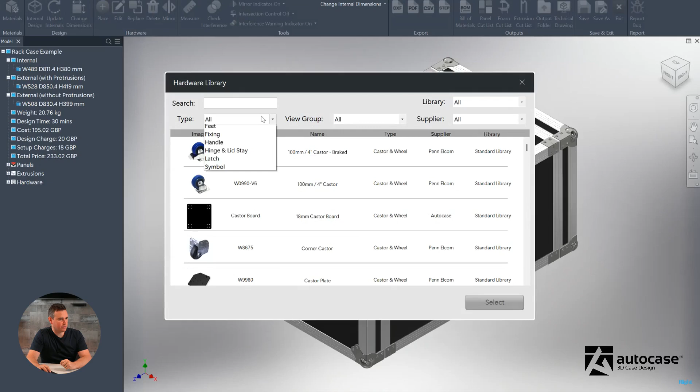So we'll choose a latch from the library. We'll find a medium latch, something like this one here. The program will automatically offer us all the options of where it could go.

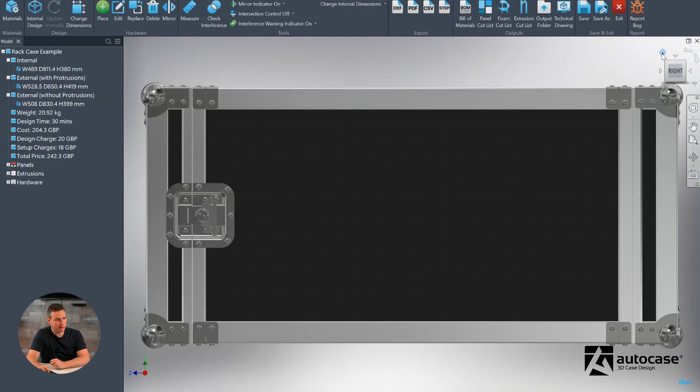We'll choose the center anchor point and leave the latch central, place that on the case, and then mirror that around. You can either select the hardware or the work planes first, it doesn't make much odds. So we've selected our 2 work planes and now I'm going to select the hardware.

So now we have 4 latches mirrored around the case. And then if we come around to this right hand side and find a handle that we want to use. So I've chosen this handle.

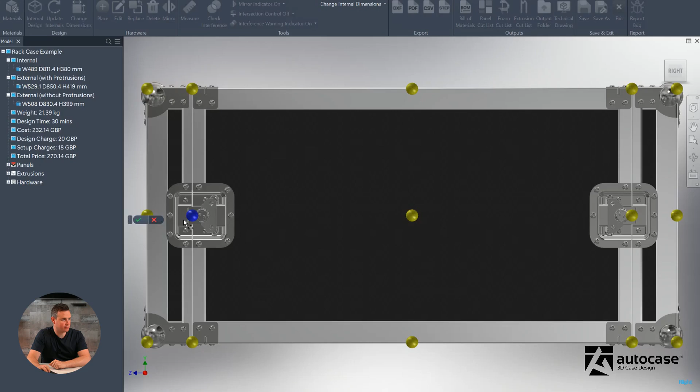From an anchor point of view, probably if we want to keep these handles central on the height but keep them close to one side, I'd use this anchor point and then move the handle over, central on the height, a little bit of space. And then once that's on the case, we can mirror that around as well.

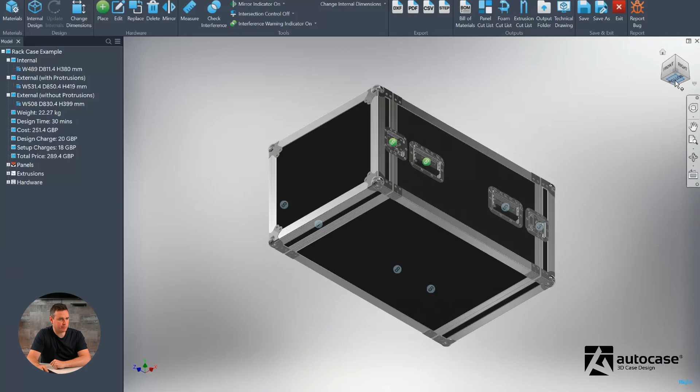So now we've got 4 handles, 4 latches, and we could also put some feet on the bottom as well. This one here would work, 16mm foot.

Just like any other piece of hardware, we can decide where that's going to anchor from. Choose this top corner and I'm going to tuck it in. You could use a measurement, but I'm just going to tuck it in visually up here. And then again, we can mirror that.

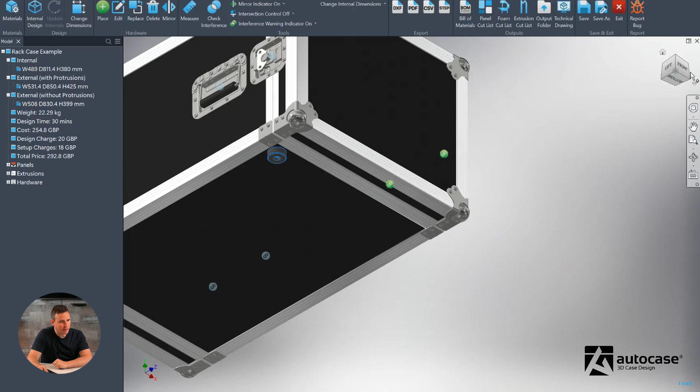Just something to note, if you've clicked on a piece of hardware and then you use the view cube, it will rotate and view around that piece of hardware that you've selected. So I'm going to mirror, use this piece of hardware, and then that's going to go across this work plane and this work plane. Check on the underside, there they are.

So now we're going to go into the internal view and add the rack strip in. Currently you need to manually calculate the height that you need for the size of rack strip. So once you've done your calculation, in this example I've already allowed 380mm, which will give me plenty of space for an 8U rack strip.

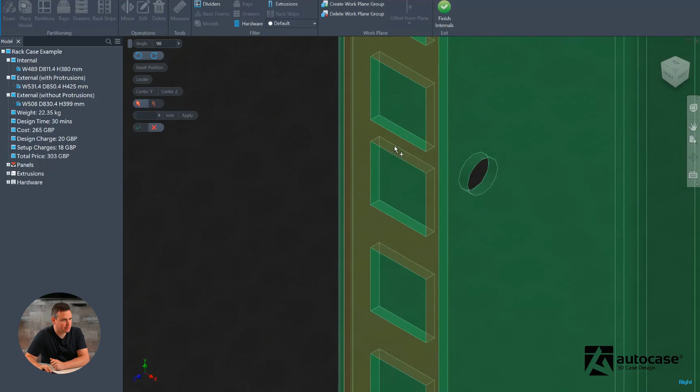Let's get into the internal design and then we can choose rack strips from the top and find an 8U. What we do is we click on the face that we want to place that on, essentially selecting a face and then selecting a second face or work plane.

And then we have a measurement here. So currently we have 287mm from the face to the work plane, and I want that to be 0, then hit apply. That's important, that's done the front referencing.

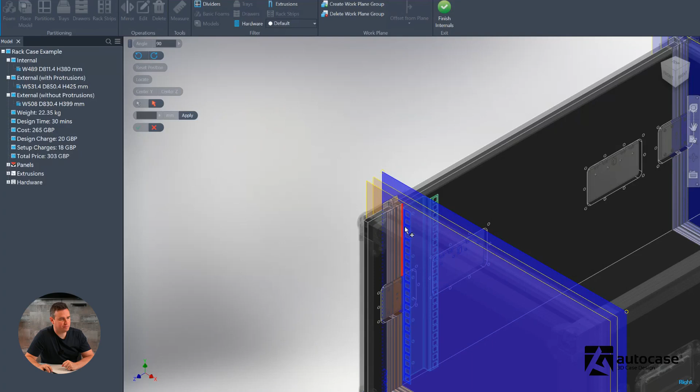We now need to reference the height. So go in and very carefully get a top flat edge, and then we'll use an inner case top face as well. So now we can see we have 10mm between those 2 faces.

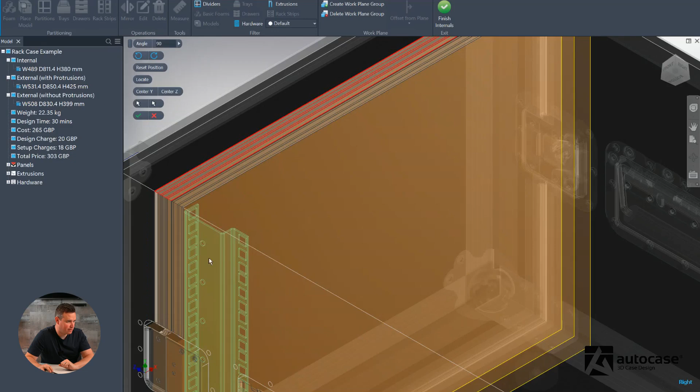I can do less and hit apply, and that moves it up, and then I can hit my green tick. But what you will notice is we are now not central, we are higher than we are at the bottom. So we want to get that in the middle again.

It was already in the middle before I changed it. So edit the rack strip, and we have this easy center Y. You can see we've got a Y down here and we've got center Y. That automatically centers that for us, and then we hit the green tick.

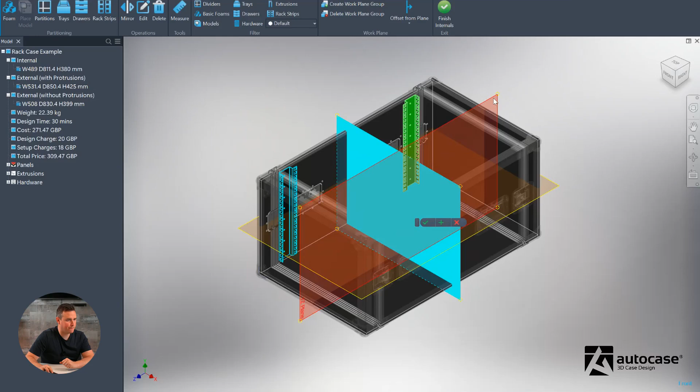And then just like the external case, we can mirror. So click on the rack strip, click around on the work planes, and then the green tick. And they are now all placed, as you can see.

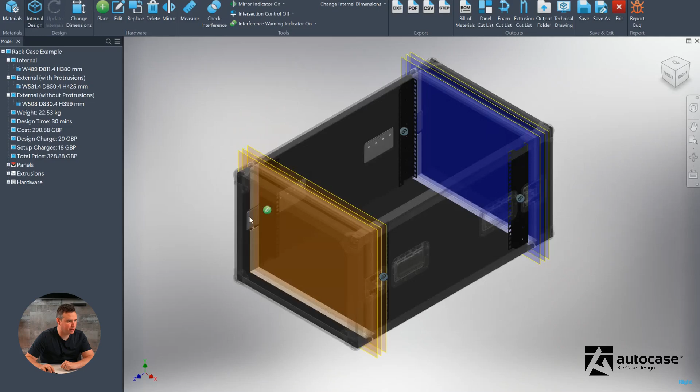Central. And then if we come out of the internal design, you'll be able to see the holes that are programmed here are drilled on the panel and will appear on the DXF for the fixing holes. From an internal point of view, this is just a very basic example of the rack strip.

However, you could add them individually or in pairs and use different work planes in order to create different positionings. Something to bear in mind currently, which will change at the end of this year, if you make this case bigger, the rack strip will simply move with the case but won't get any bigger. So you have to replace it with a bigger rack strip.

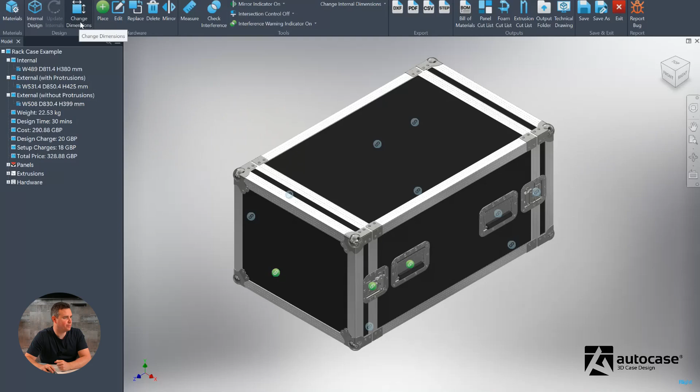But we have a new rack strip function coming at the end of this year, which will automate a lot of the rack strip functionality in Autocase.